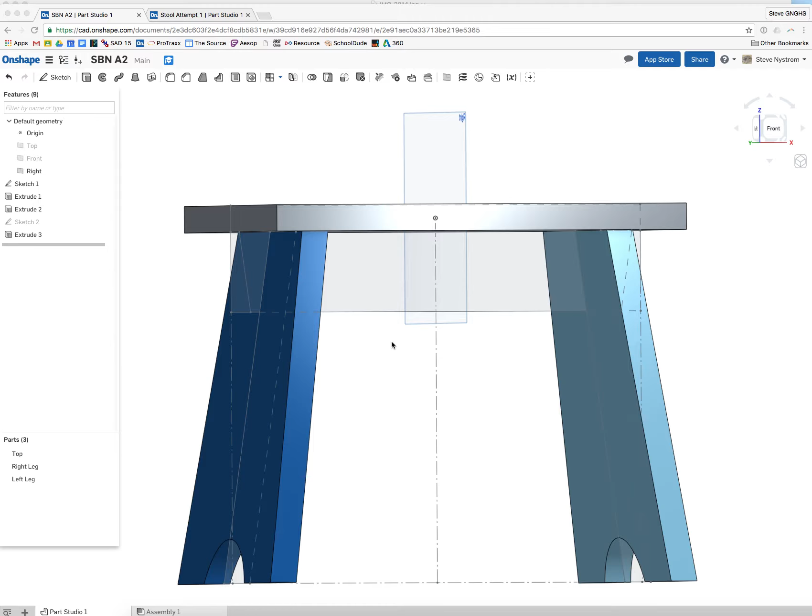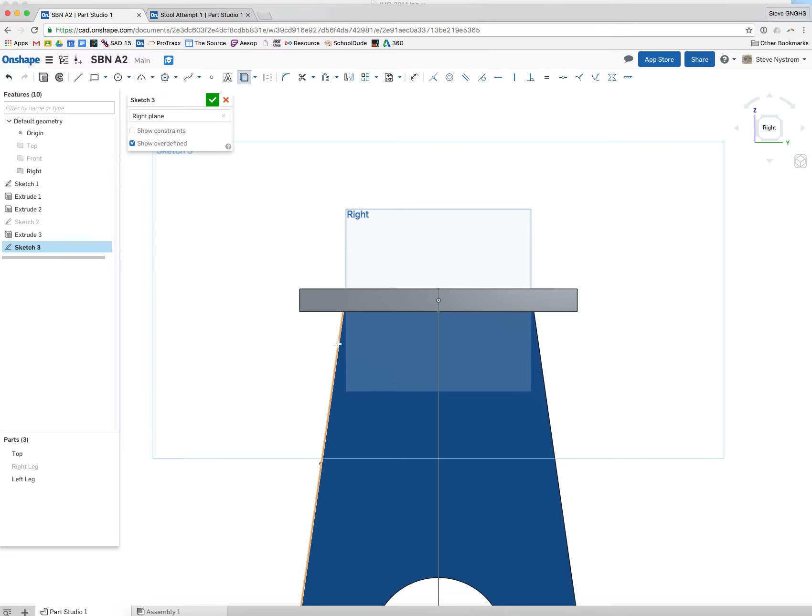So there's my front. I'm going to go over here once again to my right plane, make a sketch on it, hit N for normal so I can get myself over to here. And like on the last one, I'm going to turn my right leg off so I can see what's behind me.

And I'm going to use the Use tool, and I need this, and I need that. So let's just add that to the mix just for kicks and grins. Alright, then I'll turn that other leg off. So this is what I'm looking at, and if I swing this to the right, I'm going to try and make this bar piece next.

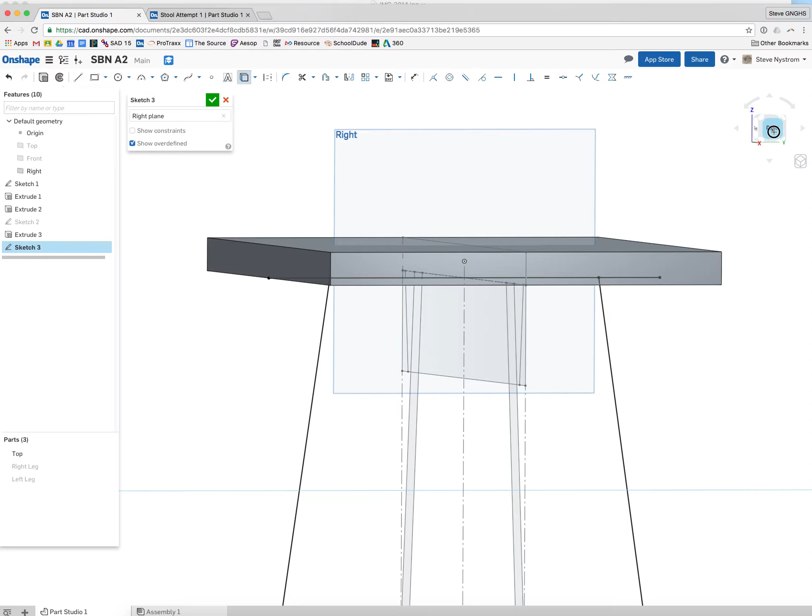So this is where we're going. Make a line. We're going to start up here, come down. We'll just sort of highlight that so we get to be parallel, and come down some distance, and then I'm going to come over in a horizontal position. Again, I don't want to necessarily stick right underneath that, so I'm just going to come down horizontally and then go back up to parallel.

And I probably don't need to close this off, but I'm going to close that off anyway. Hit escape. I want basically 3/4 — this is going to be a 3/4 inch piece wide. I want 1/2 inch to be out here and 1/4 inch to be in here.

So I'm going to hit my dimension tool and dimension this piece to be 1/2 inch. And you can either go from here to here and call it 3/4, or to there and call it 1/4 — kind of your call. I'm going to go from here to here and call this 3/4, so 0.75, and make it look like that. Now the other thing is I want this to be right there.

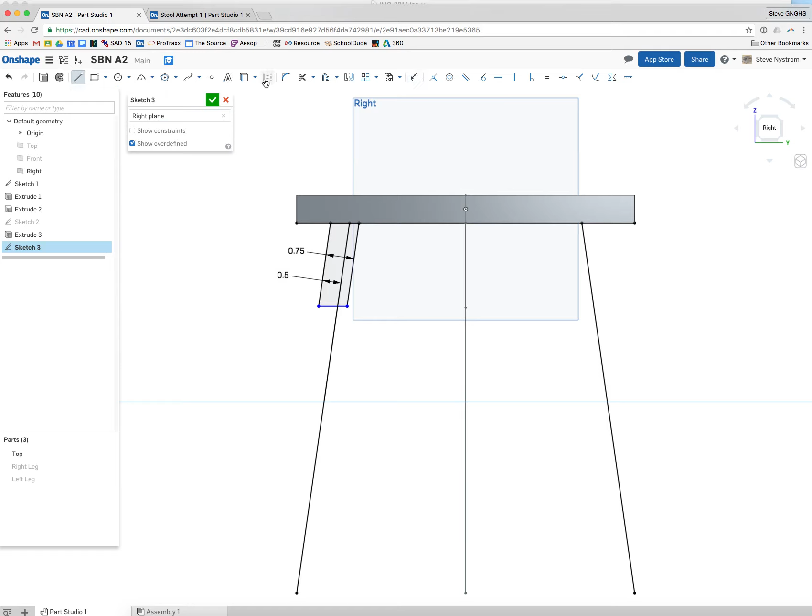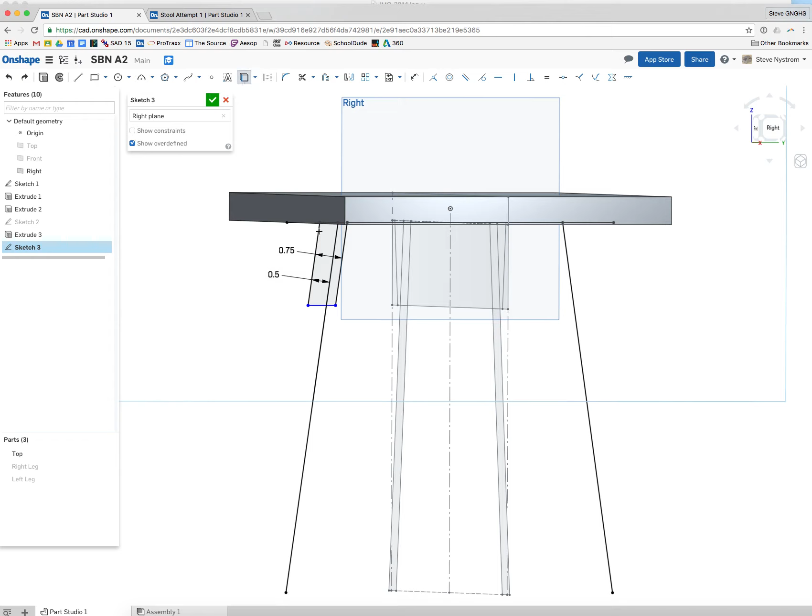So I'm going to grab the line tool, make a construction line. I'm going to highlight that point right there. If I can... whoops, let's undo that. I'm going to try and orbit. So what I'm trying to grab is the bottom of that line, so I'm going to try and grab that point or something about that. So maybe I need to do the old Use tool and grab that.

And again, go over here to the right. Let's try this again: line, construction, I want to go... alright, repeating that same error. Let's try this again, get my line tool, make it a construction line. Alright, not quite sure why that's not working.

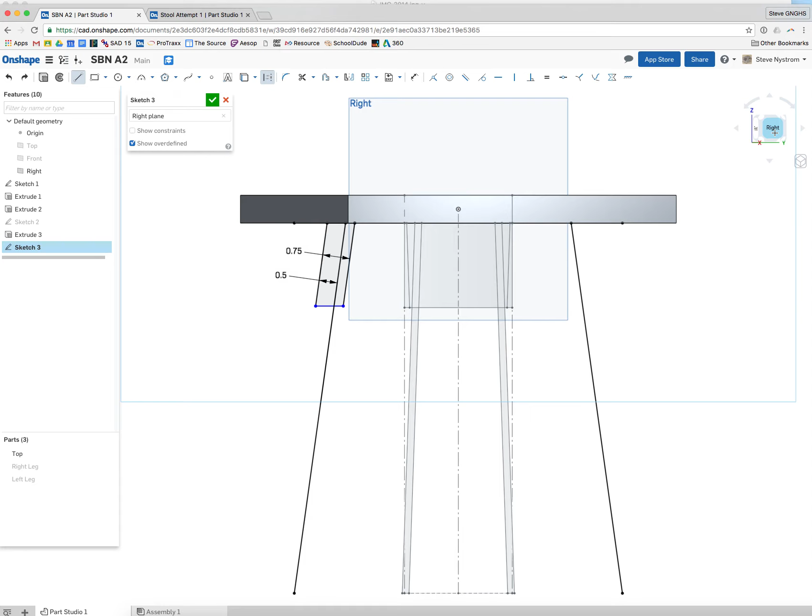But let's try it anyway. So I'll make a construction line from here to... hit escape, and get that and that. And then we'll come up here and make them coincident. Let's see if that works. And that did work, alright.

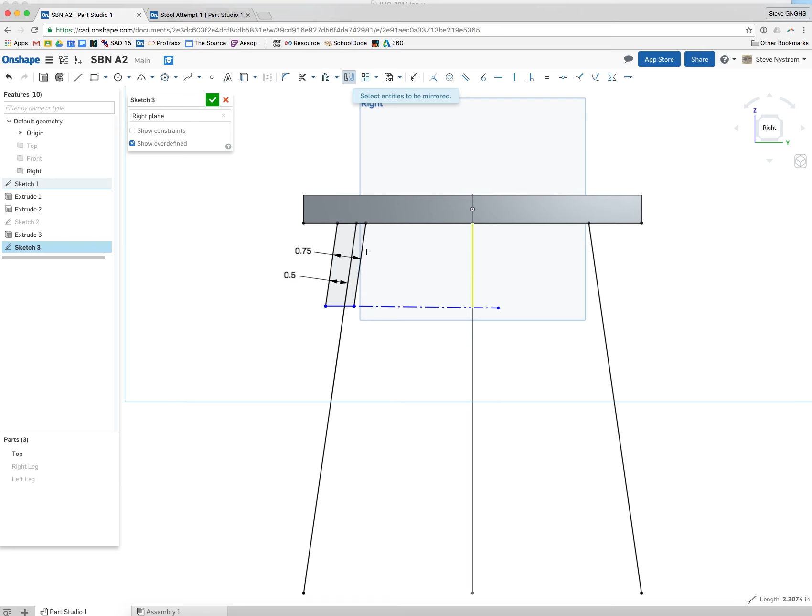And then we're going to mirror all this over on the other side. So we've done the mirror tool before. Grab this line here, and here — again, it might be hard to grab all these individual pieces, so I'm going to do a crossing window from top left to lower right, so I capture all the pieces in there, and they should show up over there.

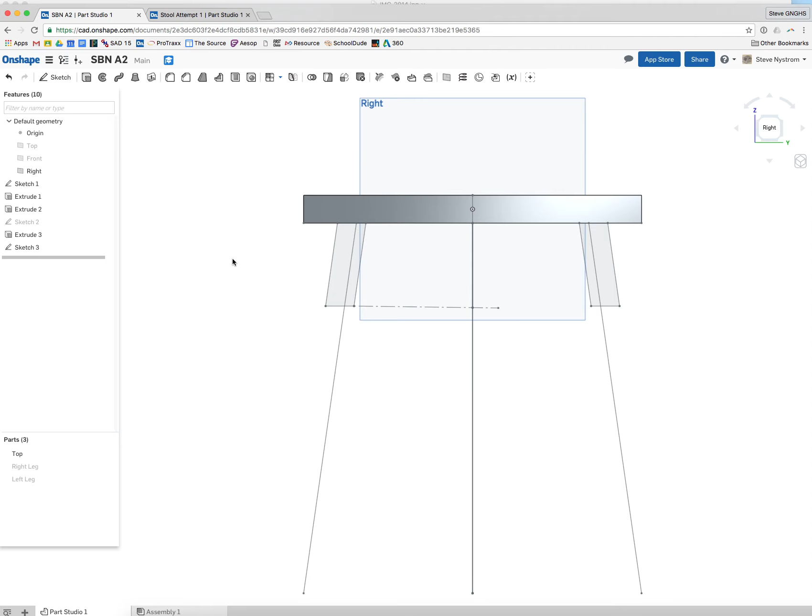And that is going to do it for that. So I'm going to get out of that sketch and orbit around. I'm going to do an extrude. I'm going to grab this piece, and probably should have grabbed the one in the back first, and that piece. Again, I don't want to add, I want a new piece coming out of that.

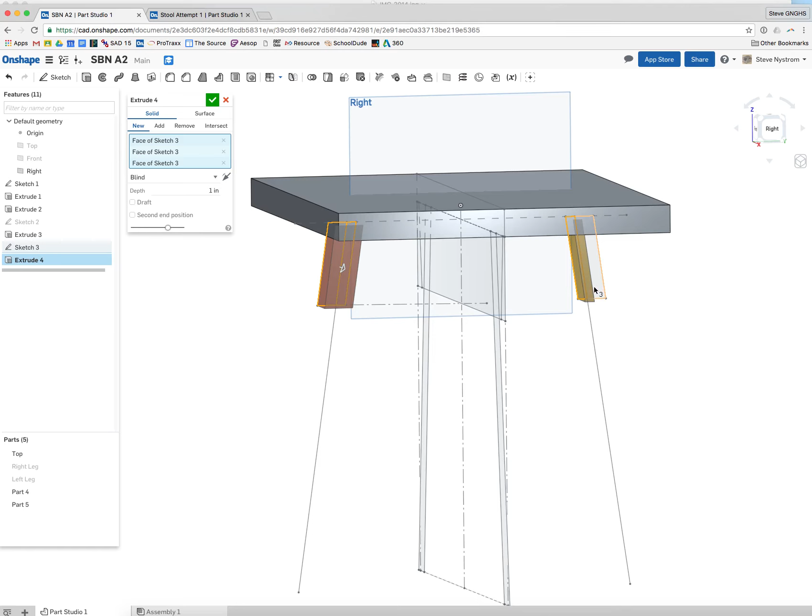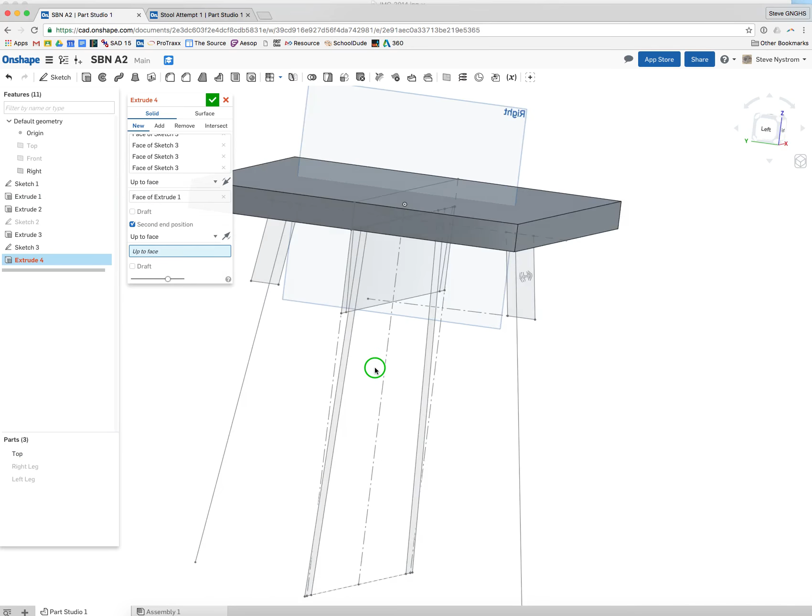I also want a new piece coming out of this, so I'll grab that. How far do you want to go? We're going to go all the way out to the edge here, up to face, and grab that face there. We want a second end position, also up to face, going up to that edge there, so that as you look at this from the right, that's what we've just made.

And they're at the right angle because we referenced the legs. So we've got 2 more parts down here. Hit check, good to go.

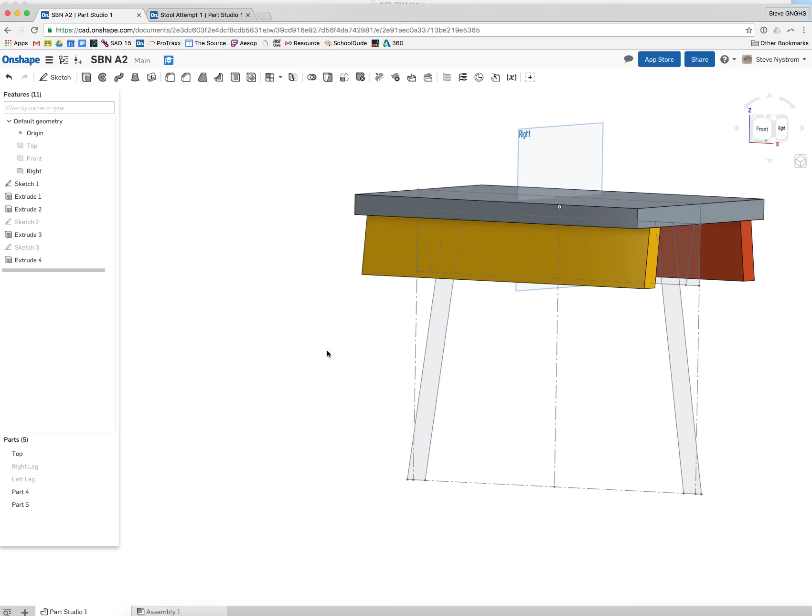Let's orient ourselves to the front. The yellow one's the front one, so I'll grab that, right click, or for you control, rename it, and call it front support. And logically, we'll call this one the back support.

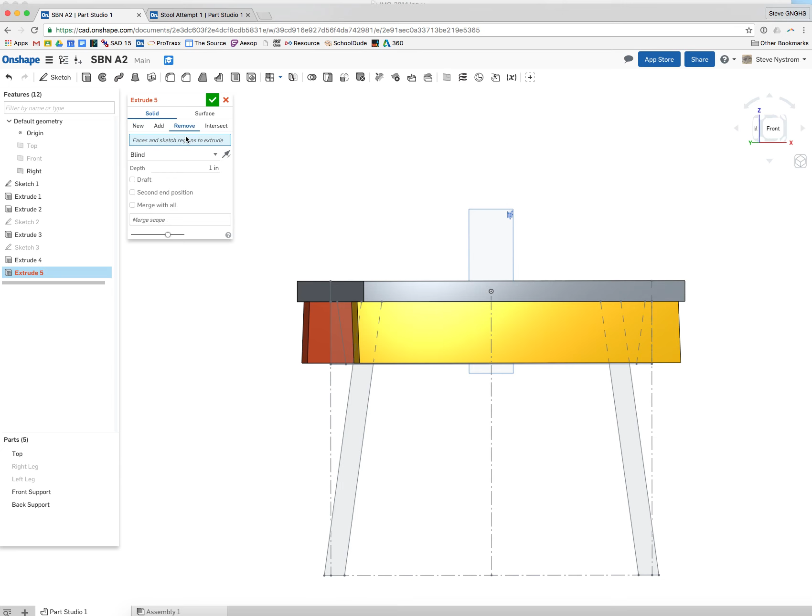We need to cut those little angles off of that, and this is the easiest part, so we'll hit extrude, we want to remove material. The sketch we want to use is that little guy there, and that little guy there, and we want to go through everything, it's fine, and merge with everything. Then we want a second end position, go through everything, and check.

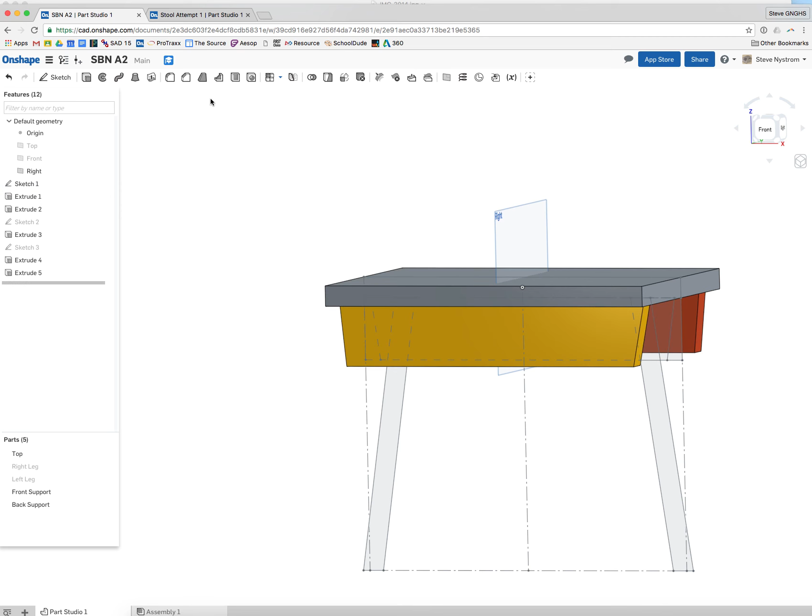All right, so we're here. I'm going to turn my legs back on because now we're going to get to a sort of a weird part.

We have to cut some material out of these front and back supports, because when we get done with this, there's going to be a notch in the front and back supports that actually grooves into that. So this is how that's going to go.

Up here there's something called a Boolean, and we're going to subtract material. The tool we are going to use to subtract is this leg, and the target we're going to use the tool on is this beam here. We want to keep the tool, that is, we want to keep this leg, and hit check.

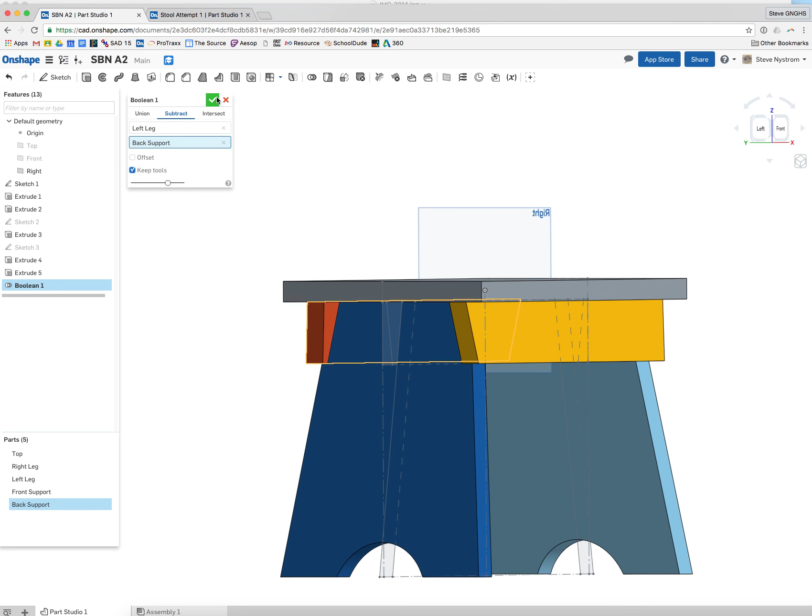Now I'm going to take that left leg out and show you what just happened. So you just did that cut right there. We used the leg to cut this little notch out of the target, this back support.

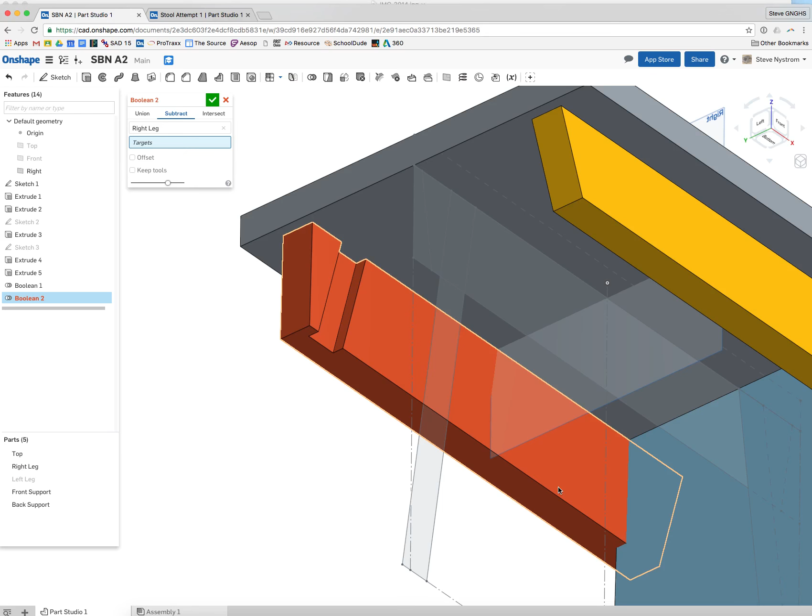So we're just going to do that 4 more times, or 3 more times. Boolean, subtract: the tool I want is this, the target I want is that, I want to keep the tool, check. I want to use that as my tool, my target's going to be this front support, and I want to keep the tool, good to go.

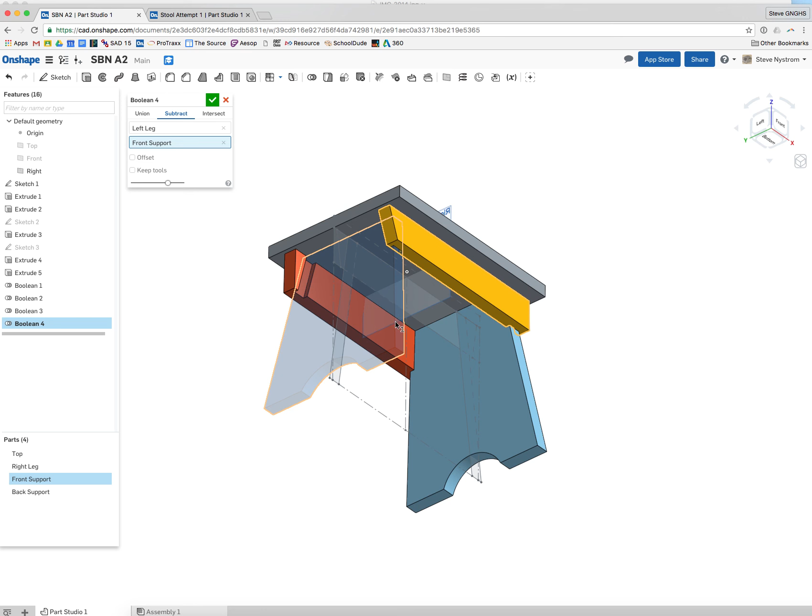We'll turn the left leg on and do this one more time. I want to use this leg as my tool, the target's going to be the yellow guy, so we can make that little cutout. And again, we want to keep the tool, because the default is this leg will just disappear, but that's not what we want. Check. I'm going to turn the front sketch off, and turn the right plane off.

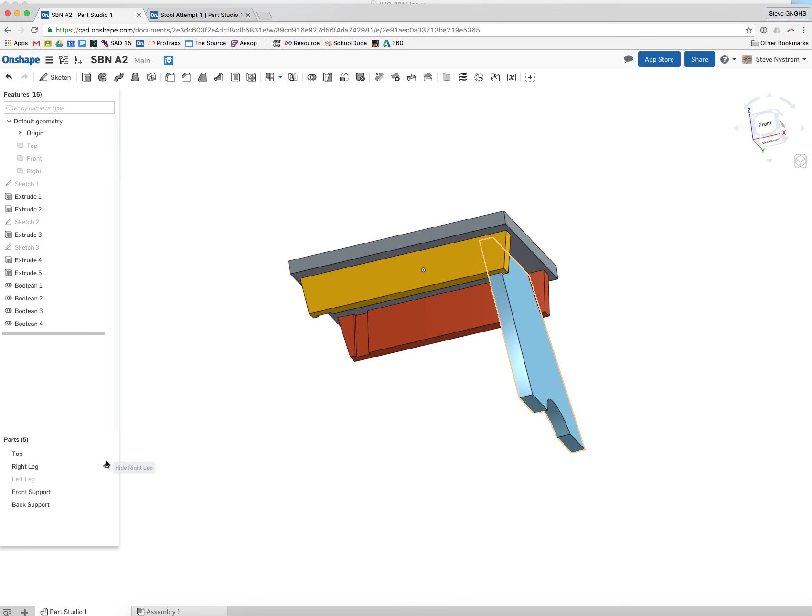And there is my stool. Once again, if you wanted to double check these, you could turn the legs off, and you can see that you made these little cuts out of there. Awesome, so I hope you guys were all caught up. We have 1 or maybe 2 more videos on how to draw this, but that's it for making it.